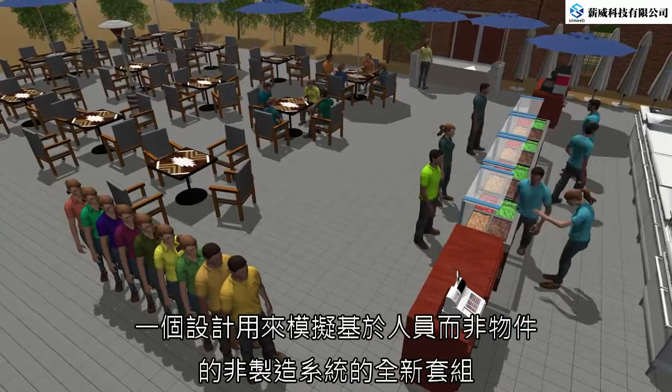We're proud to introduce the People module, our latest set of tools designed for modeling non-manufacturing systems that are based around people instead of items.

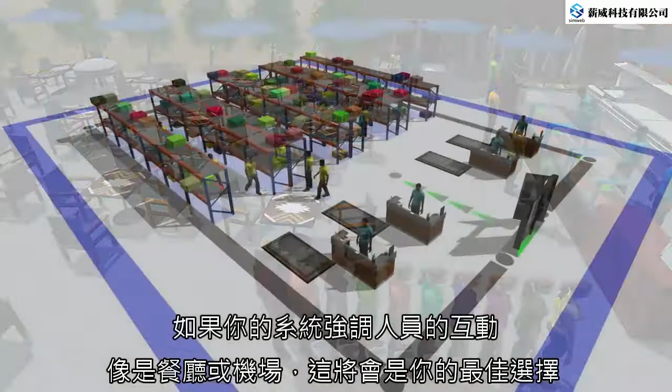When would you use the People module? It's a great choice if your system has a human interaction emphasis, like a restaurant or an airport. It's also useful for models that might not have people in them, like if you have a service fleet involving vehicles that require several steps in their maintenance routine.

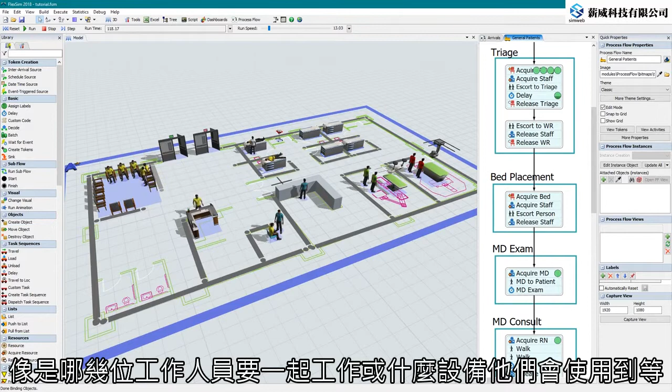The People module comes with a combination of new 3D objects and process flow activities that work together to model these situations. The 3D objects represent the locations, staff, transports, and equipment that people will interact with as they go throughout the model. The process flow activities provide the logic to create, move, escort, and transport these people to where they need to go, which staff they will be with, and what equipment they will use.

A basic model would consist of at least a few locations and staff members for people to interact with. These 3D objects can be dragged into the model view from the library, just like any other 3D objects in FlexSim. If you click on most of the people objects in the library, you'll have the additional choice of what shape you'd like that location, transport, or equipment to have in the model.

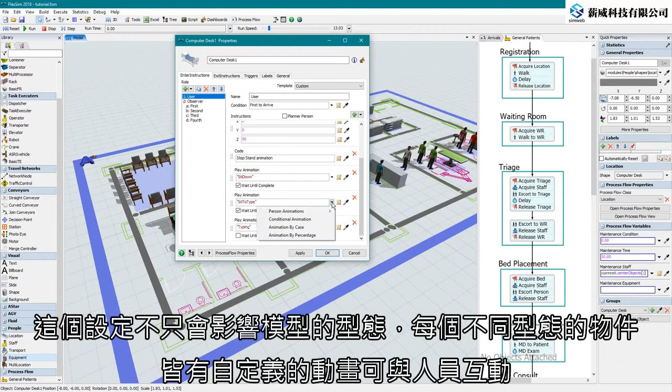This affects more than just the shape, too. The different shapes each have their own custom animations when people interact with them.

The People module logic occurs in process flow, where the create person activity starts the action. From there, you'll have an assortment of activities to have these people walk or be escorted or transported by staff to different locations for delays or other activities.

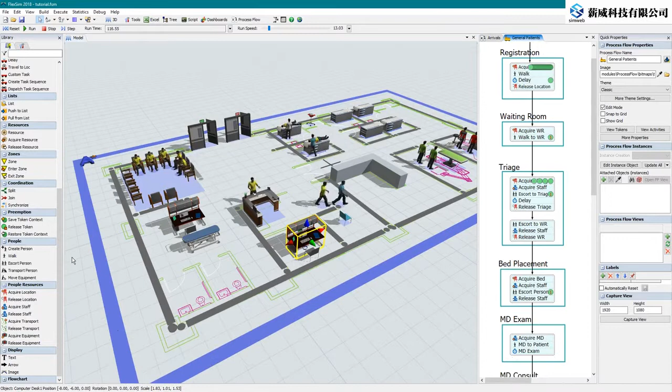Simply use these building blocks along with the other tools in process flow to imitate what happens as people interact with your real-life system. There are a few unique elements that make the People module great.

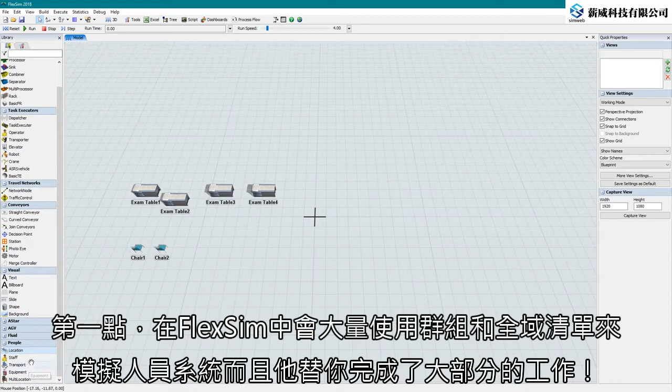First, it makes heavy use of groups and global lists in FlexSim to model people's systems, and it does most of the work for you. As soon as you drag out a 3D people object, all the necessary lists and groups for all locations, staff, transports, and equipment are automatically created for you. And as you add and remove objects, the groups are updated to reflect your changes.

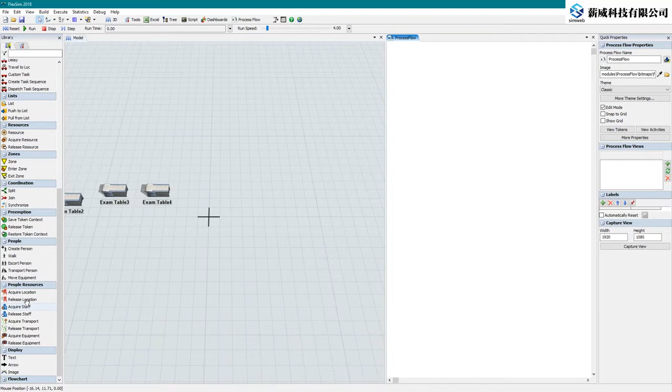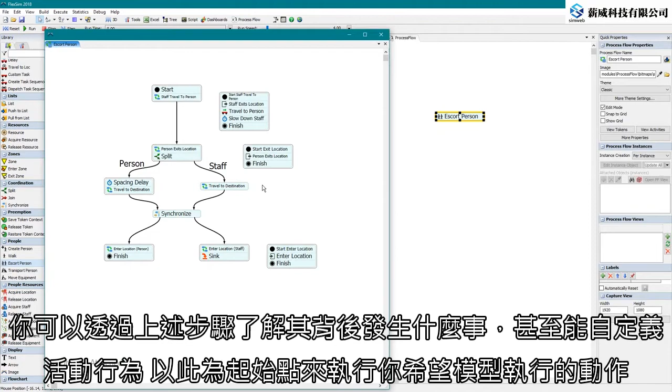The people activities do quite a bit while requiring very few inputs. You can see what's going on behind the scenes and even customize the activity behavior by right-clicking on it and selecting View Inner Flow. Use this as a starting point to do exactly what you need your model to do.

Finally, the People module brings dozens of new animations for people in FlexSim models, from different sitting and standing animations to things like typing or shouting.

Locations and transports have templates already applied that add visual realism to the model. For example, when a person enters a computer desk location, they position themselves in front of the desk, sit down, and start typing at the computer.

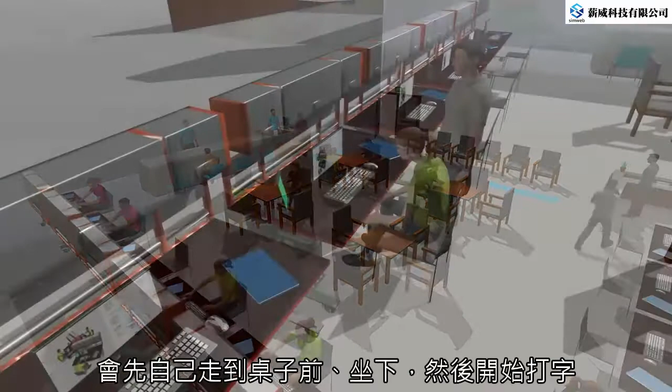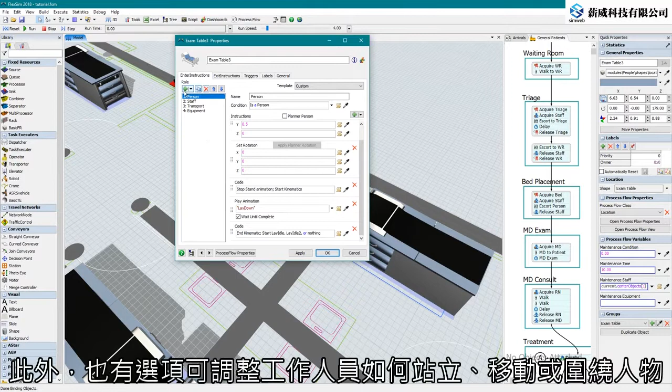You can customize these existing templates to create different visual instructions to people that enter and exit these locations. Simply select Custom from the Template drop-down menu. The People module comes with more than 60 animations to choose from as you tweak the template. There are also options to adjust how staff members stand, move, or animate around the person.